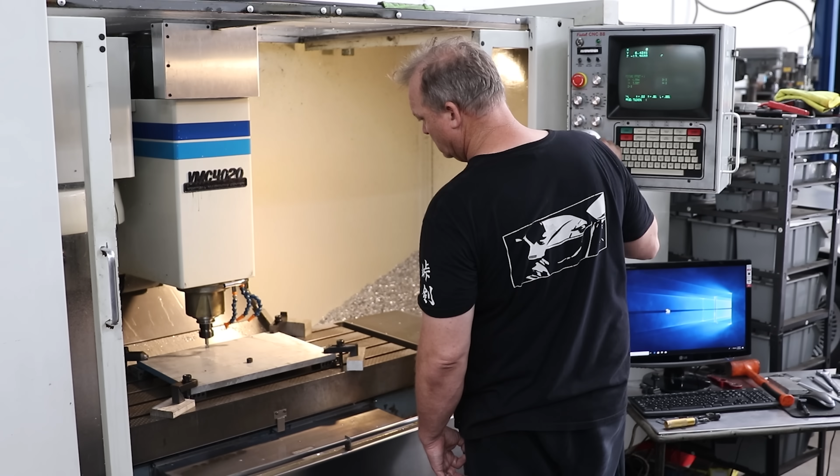All right guys, we're back here at Papadakis Racing. Steph has the new motor plate all designed in CAD on his computer, so we're gonna go check that thing out before the program gets emailed off to OMD and Ferrari Steve down in San Diego to get cut on their CNC. Let's check it out.

Steph! What's happening? What up? I got your motor plate already brought up, so we can go talk about that. That thing looks sweet! Yeah, so the CAD program we're using is called SolidWorks, and what we do is we start with the Romer arm, and we need to find out where all the bolt holes and the different features on the block are in space.

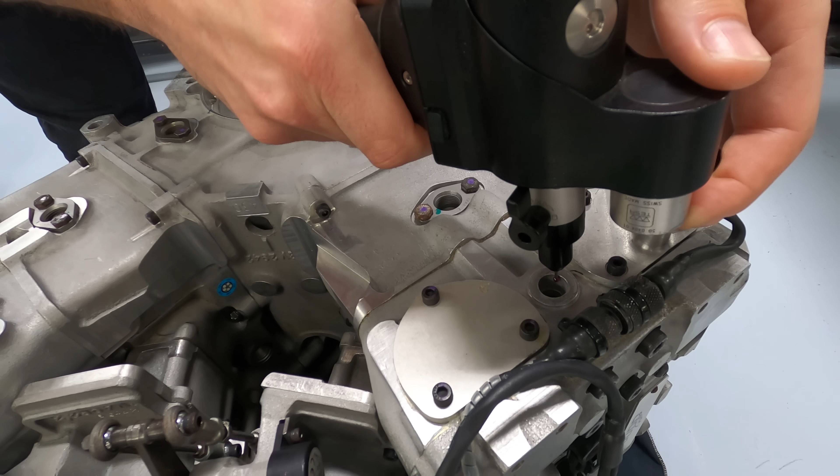Let me go backwards here. So all these different points are the bolt holes and the different dowel pin holes on the Judd V motor. So we'll start with just all of the bolt hole locations, and then I actually took a picture of the engine, and I can lay that over.

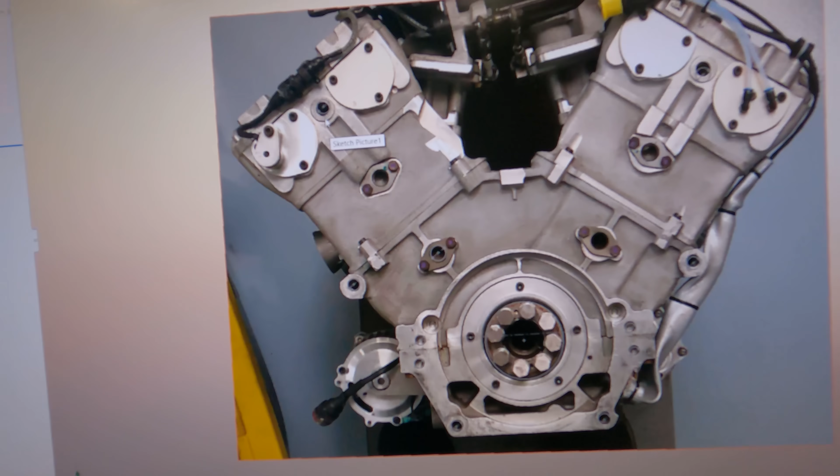Whoa. Yeah, so if you look, the points are still here. I mean, it's not perfect, but just to get an idea of what the motor plate kind of looks like and if there's anything that I gotta watch out for.

That's pretty cool. Yeah, and then I've added now the extra bolt holes for the bell housing. Bell housing bolts, and then bell housing bolts plus Judd V motor bolts. So now we know where all of the hardware is gonna go.

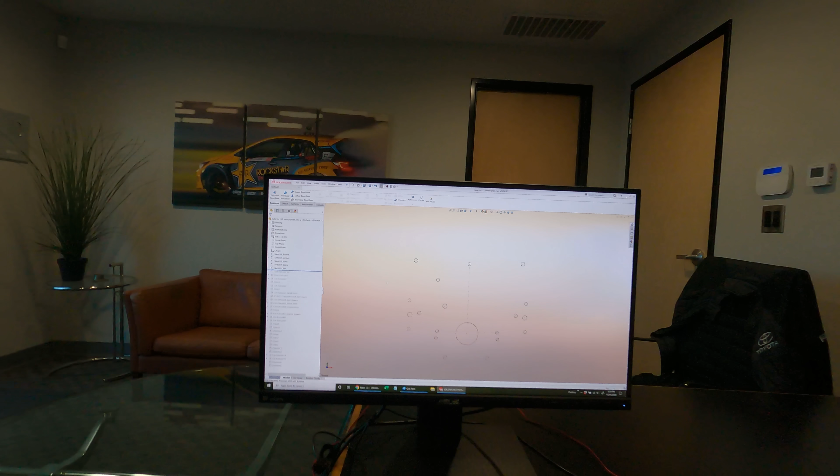And then I also took a picture of the bell housing. That's the bell housing, and those are all the points drawn on that, yep. And again, it's not perfect, it's just to get an idea, mostly for styling in a way.

Yeah, so this is now the outline of the motor plate, but there's no features in it yet. It's just an extruded piece with a shape. There's no pockets in it yet. It's basically just right, and that's built from a sketch that I do.

So this is the sketch based on all of the different points in space, and then just start making an elegant shape that makes sense, that clears any kind of features on the engine. So once you get your sketch done, then you extrude it, you turn it into an actual solid. On the left here is our tree, our build tree. Every time we add another feature, it adds another element to that tree.

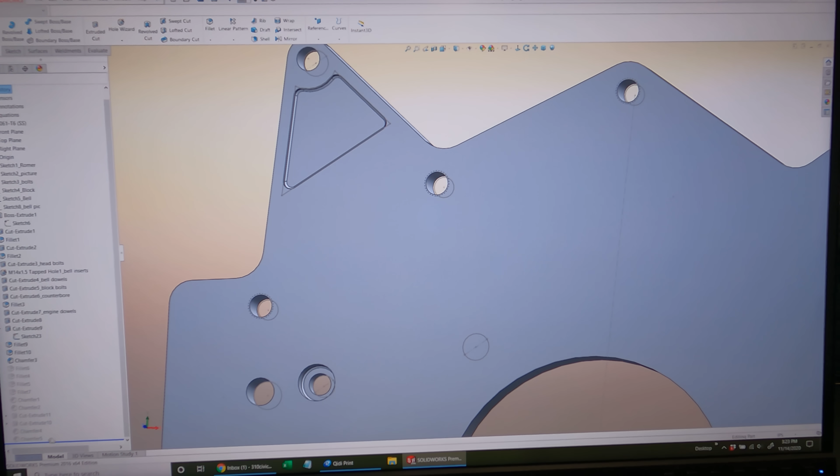Cool. Eventually, we put the holes in it, so now we've got holes in our plate. Now we've got the bell housing holes and the block holes. These are pockets now that have fillets and everything in them to make them look good. And eventually you just end up with the part that has all the right holes.

And then if you look, there's little features here, like these little chamfers. Cool. That the machinist can go and make sure that not only is it not sharp, but add some styling elements to it as well.

And that's it. I probably have maybe, how many hours? Yeah, probably 5 or 6 hours. Okay. Yeah, but this isn't my first plate, you know, so I already kind of know where to go and have an idea of the workflow.

You know how to navigate the program well at this point, and yeah, this is relatively simple too, because it's just 2.5D. There's no 3-dimensional contours or anything on it, and we're not connecting a bunch of stuff. It's just a shaped plate with several holes in it.

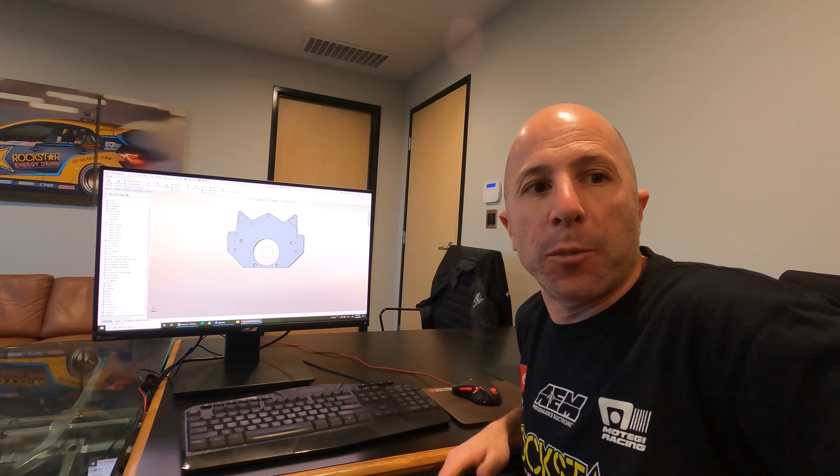I mean, the precision is what's really the most important thing, and that's where the Romer arm and being able to decipher that information and then be able to put it into the software comes in. And then at that point, you're now relying on the machinist. So we'll not only give him the model for the part, but we'll also give him what we call a print.

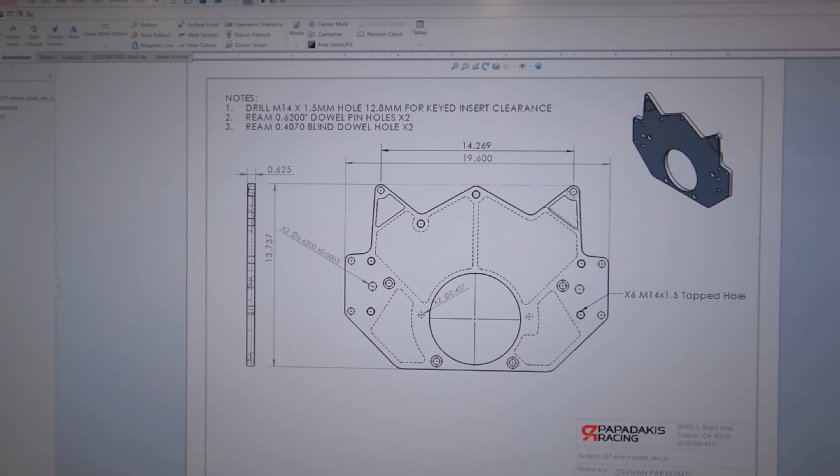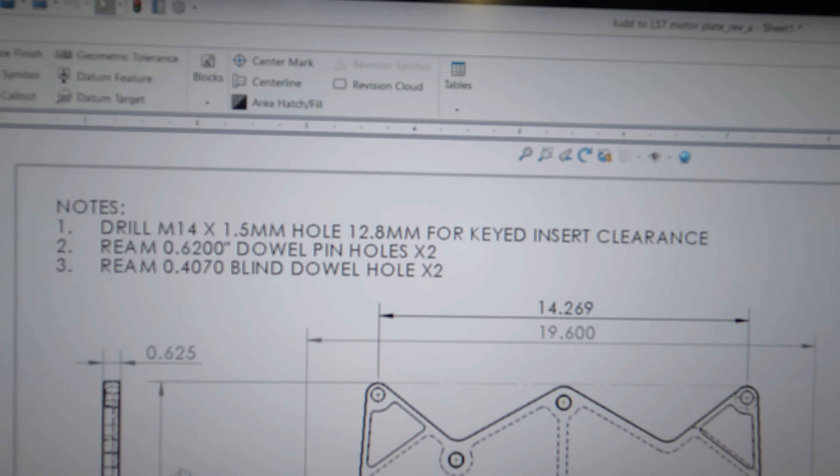The print shows where the tapped holes are, an overall dimension like the largest dimensions, width and height, so we can get an idea of the piece of stock or material he'll need to purchase, the thickness of it, and a couple of notes, like the dowel pins that align the block to the motor plate and the motor plate to the bell housing.

These are very precision, so we note that they need to be reamed instead of just drilled with a drill bit. This is for what we're doing, like hobbyist plus motorsport level stuff. If we're doing aerospace, it'd be much more involved, I'm sure there's engineers watching. This is a simple print, but for what we're doing, it gets the job done, and we can be efficient, have a phone conversation with the guy doing the machining, and come out with a good part. Glad to have you on board for one of the most important pieces of the puzzle.

We're going to email this off to Ferrari Steve down in San Diego at OMD. He's going to cut it on his CNC, and as soon as we get it back, we can fit everything up, make sure it's all set, and get that thing fitted in the engine bay. Pumped.

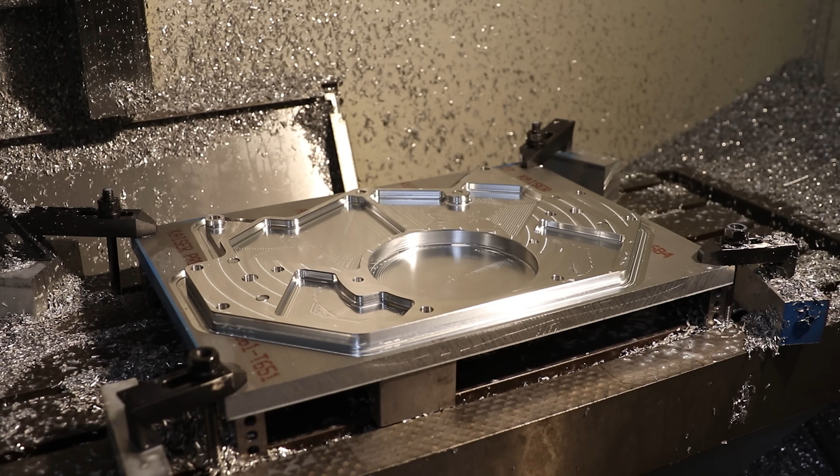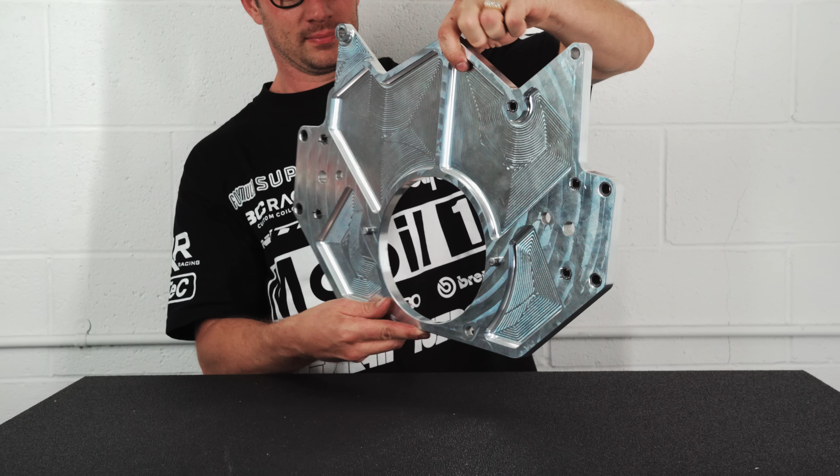We got our motor plate back. It is looking sick. Big thanks to Steph for designing this, and also Ferrari Steve down in San Diego at OMD. He wrote the program and cut it on his CNC, and it came out sweet.

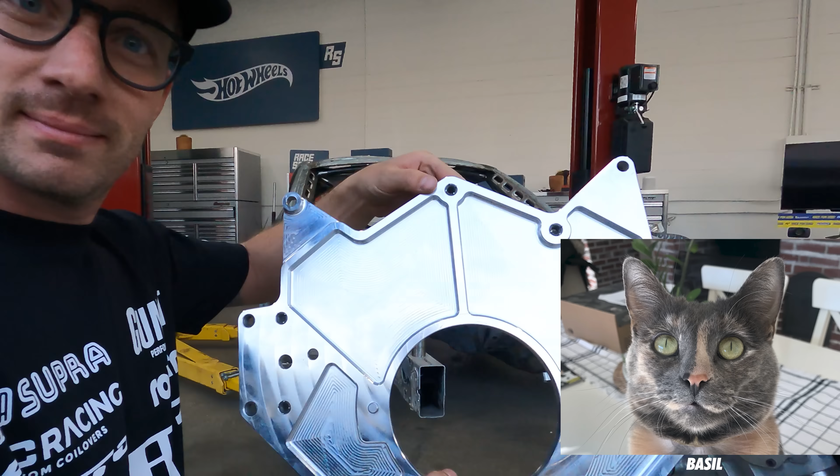Kind of looks like a cat, sorta. I mean, use your imagination.

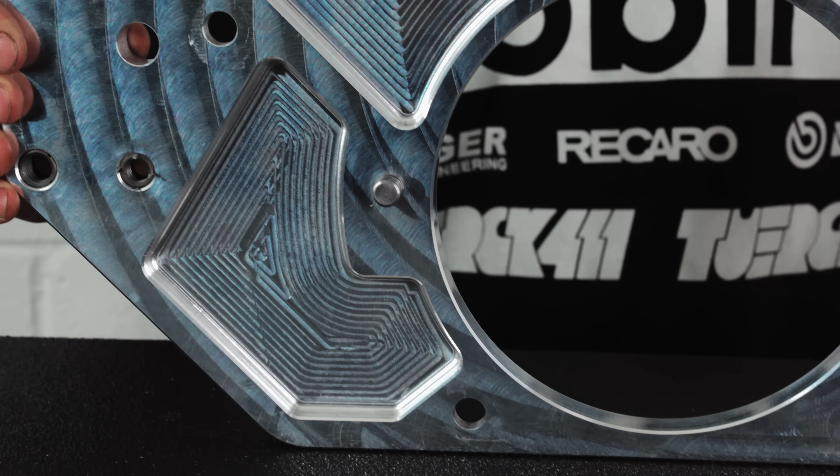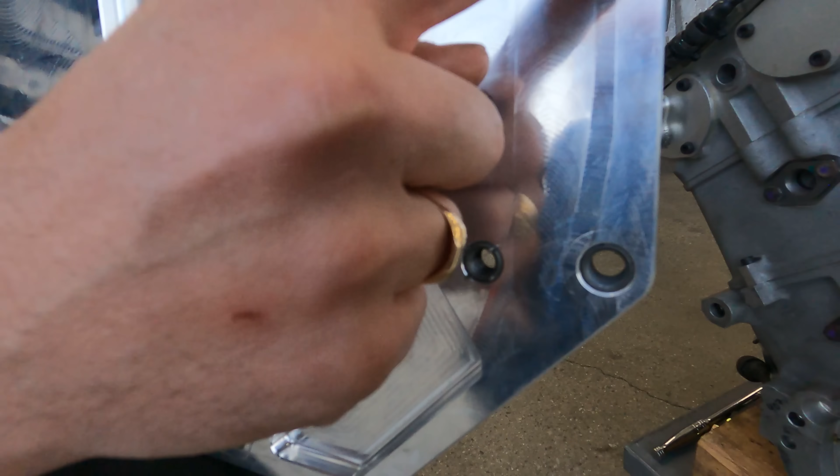Dominic got all the nutserts in here, so we didn't want to rely on all the aluminum threads, especially mating the bell housing of the Holinger, and also it being mated onto the back and being that major support for the drivetrain. So we got steel locking threaded inserts in pretty much every single hole we're going to use, and those are obviously more robust and a lot stronger than the aluminum threads.

So we got our dowel pins here, and everything came out really good. We got some nice pockets cut in here to keep this thing really light. This is the back side, where the bell housing is going to mount from Holinger, and everything's recessed in here, so everything's nice and flat when it gets bolted on. I'll show you guys that in a second.

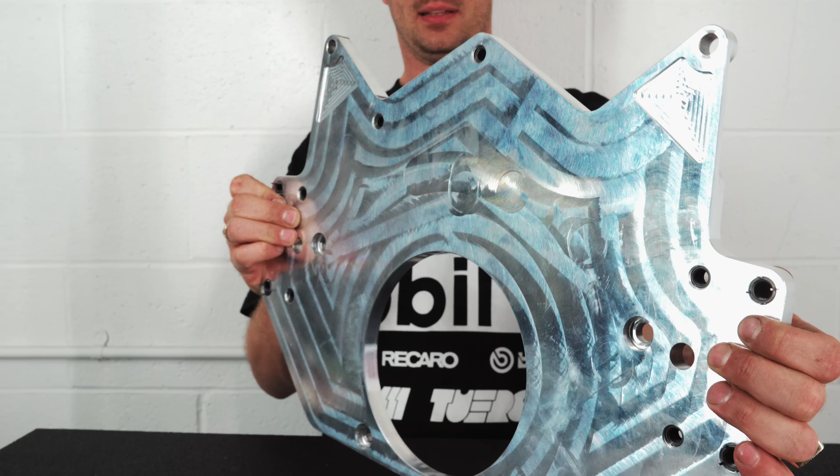We designed this in conjunction with Holinger as a 5/8 plate so they know how big the custom flywheel they're making is going to be and how far back that's going to come out, along with the quill shaft and where the transmission is going to lay. They also made a custom spacer on the transmission, that I'll show you guys here in a little bit, so that all of this stuff fits up perfectly.

The shifter fits right where we want it to, and the transmission tunnel and all of that. But right now, we're going to get this thing bolted up and make sure everything's all good.

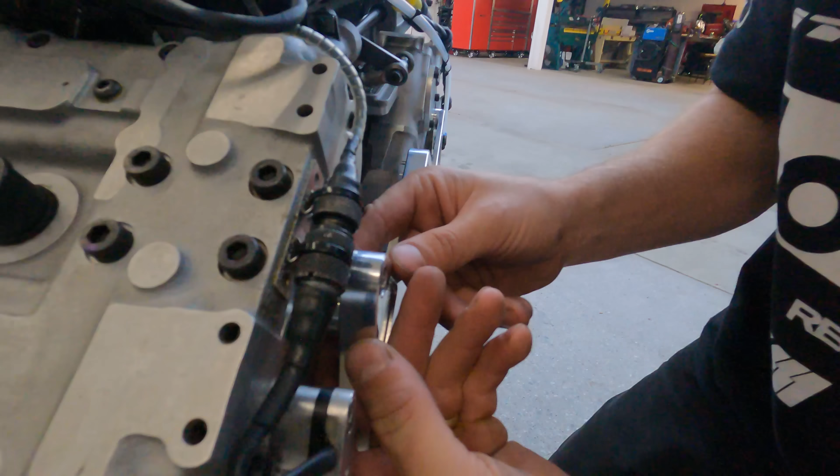It's really nice because all you have to do is locate the dowels on the back of the engine, and they are extremely tight in here, which is a good thing. There we go, put this little spacer on here. These two heads are actually offset, so we had to mill this one out a little bit shorter to make up the difference, and we just have this little spacer to bring her home.

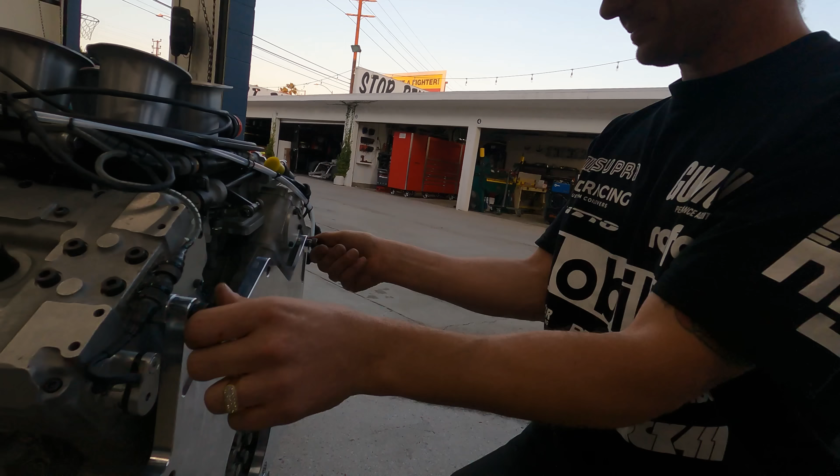So this is, I'm freaking pumped. This is such a big piece of the puzzle that's finished now. After this, Dominic can start, we can get this mocked up with the transmission on in the chassis, and Dominic can start making the mounts in the chassis for the motor plate.

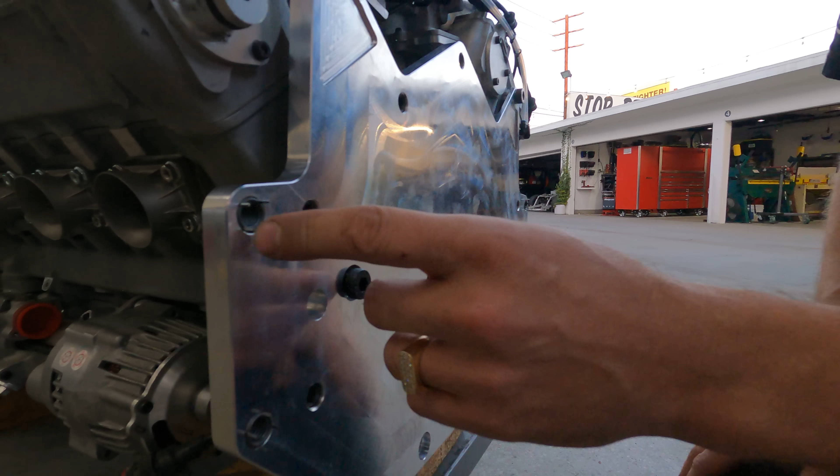So you can see the two ends here, we saved these two holes. We haven't pushed these pins in, that's why they're still poking out. We just want to make sure everything fits all good and everything bolts on fine before we set those, because once you set them, that's pretty much it.

You can't get them back out. So anyway, when we get to that, there's two brackets that bolt off to the end of here that will then go to the chassis.

It'll probably be like a nice triangular situation with the Delrin bushing that'll bolt into the chassis. Kind of a three-piece setup, because we didn't know how this was going to fit into the chassis. So we wanted to take it one step at a time, get this on, see where everything fits, then make the mounts in the chassis and the brackets for that. It's a step-by-step process since we're not designing this car in any sort of software.

Plus we got Dom's specs, so it's gonna be good no matter what. I'll wait to get the Holinger transmission and bell housing all sandwiched together, then fit that on here and place this thing in the engine bay and get to work. Let's do it.

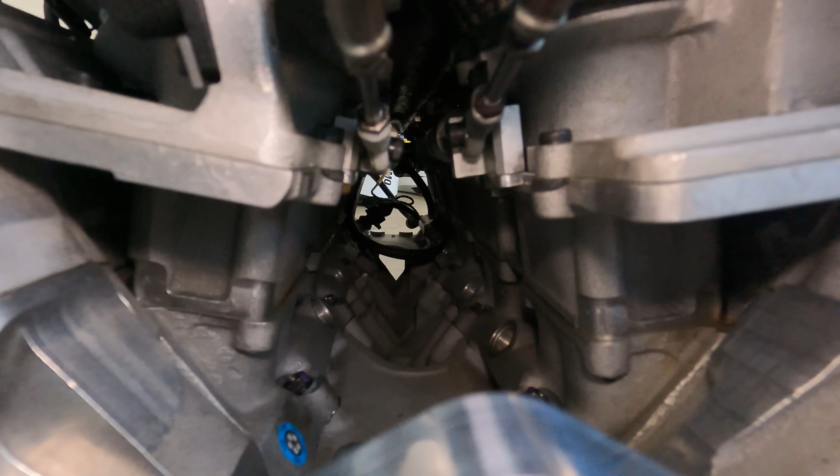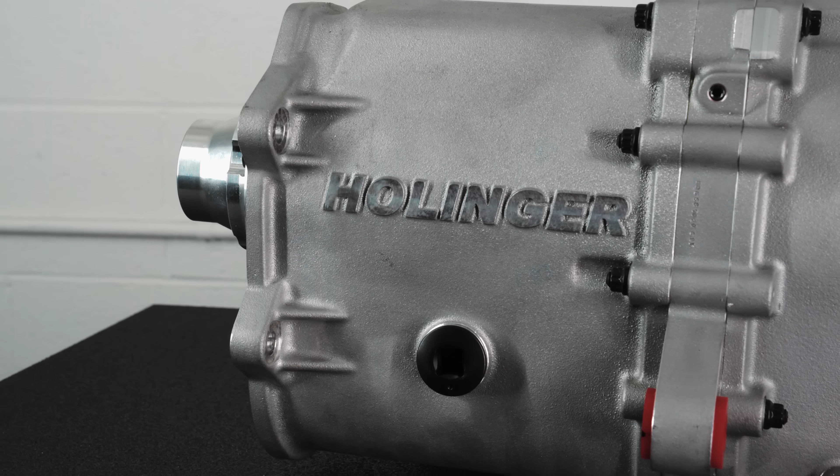All right guys, this is one of the biggest pieces of the puzzle on this build that I'm beyond stoked on, partnering with Holinger Engineering for this transmission. This is the Holinger RD6, a six-speed sequential, and I ran the same exact box in my Pro 86 car for five seasons. The only thing we ever had to replace, on a 1,000 horsepower 2JZ drift car that sees the most abuse I've ever put on any chassis, we'd send the transmission out every year to get inspected just to make sure everything was good.

The only thing I ever had to replace was a reverse gear, and that was on the fourth season, just because when you put it in reverse it sometimes grinds quite a bit. But it's a testament to how strong and amazing these transmissions are. Being able to partner with a company that has such an amazing product is phenomenal, this is massive for this project, and I wanted nothing less than a Holinger RD6S for this thing. So beyond stoked, and they've been phenomenal to work with.

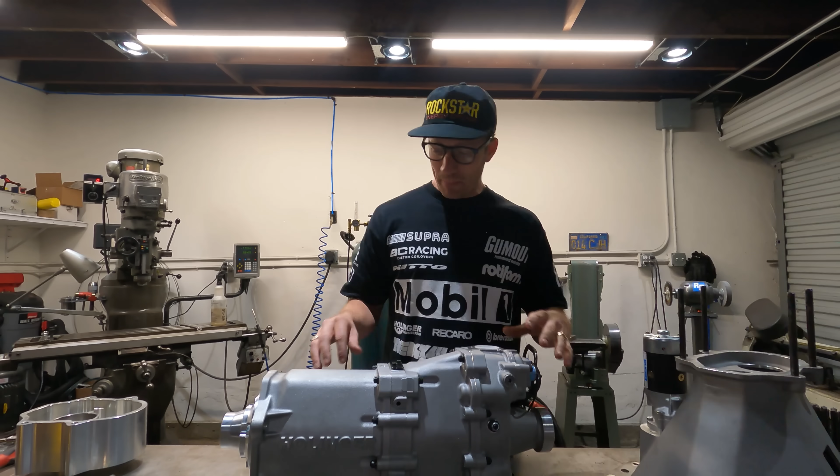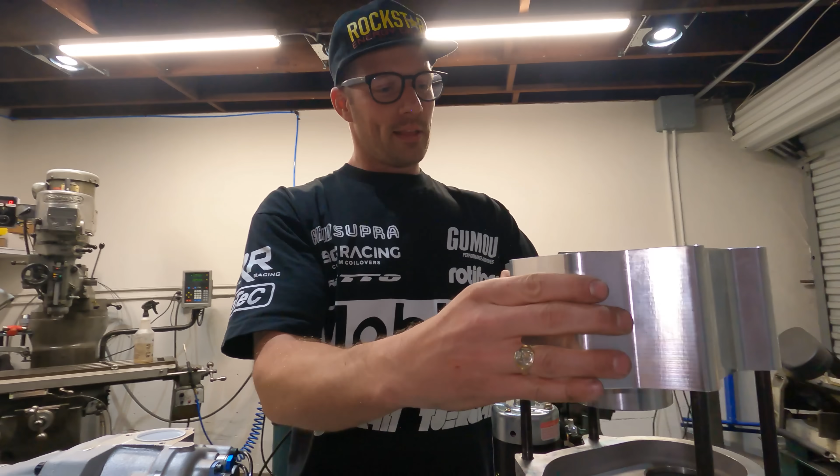They gave us access to their engineers, and they're actually making a custom flywheel that's going on the Judd motor. They work with Tilton for the clutch we're running, and made this custom spacer for the bell housing and engine so it'll kick the transmission back in the transmission tunnel, putting the shifter right where we need it. So the transmission sits really far back in the tunnel, which gives us better weight distribution, which is sweet.

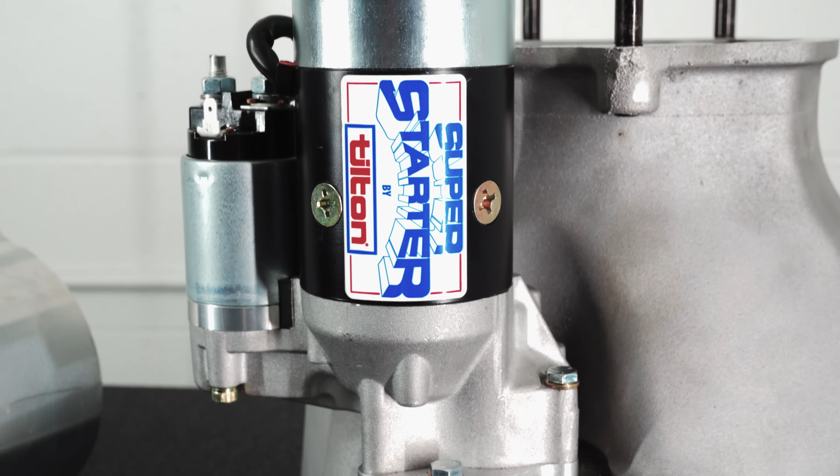This is an LS bell housing, and the reason they chose it is because we needed to figure out a starter situation with the clutch. Since we're not running a Formula car, we don't have that rear-mounted gear starter setup you fire up. We just need a push button with an actual starter motor, so the best solution was utilizing their Holinger LS bell housing, working with Tilton to use one of their Super Starters, and they made it work.

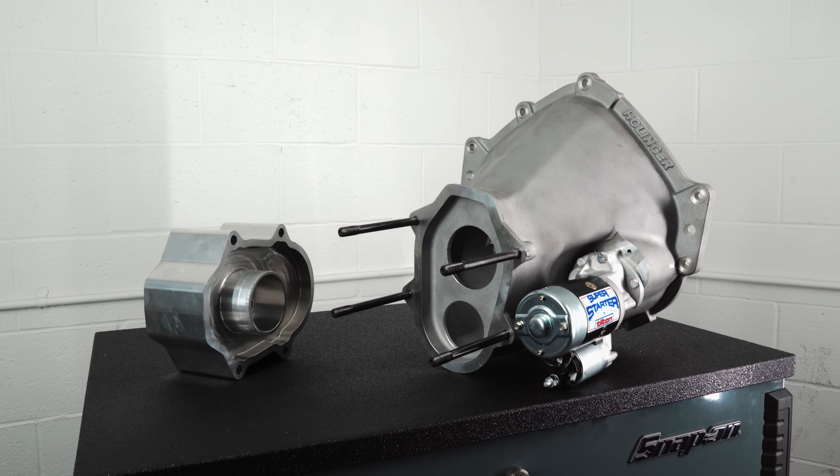So this thing just slides onto the transmission, and the transmission slides onto the new motor plate we just got, and we're styling, dude. We're gonna put this in the car and get it mounted finally in the engine bay. It's gonna be sick. Dom already has his ideas on what he wants to do, let's get to it.

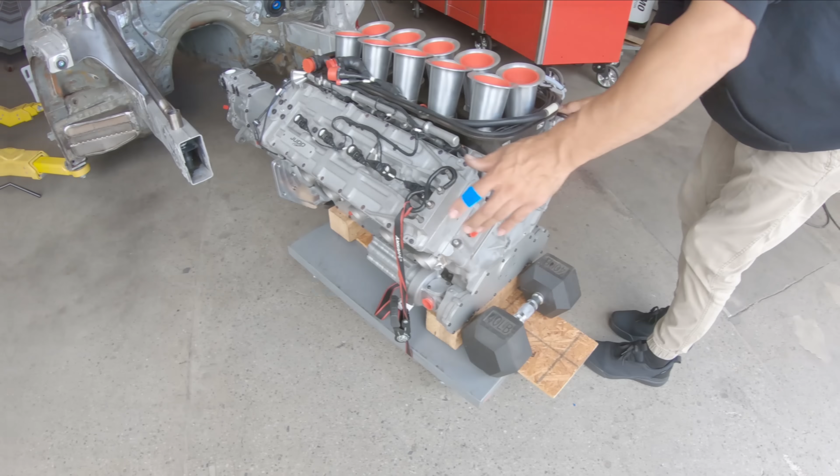The engine is finally getting put in the Supra. Everything is sandwiched, bolted, tightened, ready to rock, and now we can finally place this engine in its home, right here in the Supra's engine bay. This is big, it's huge.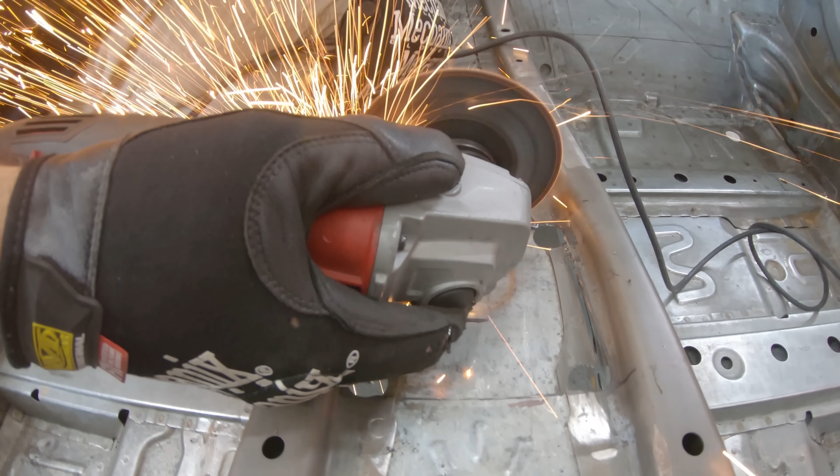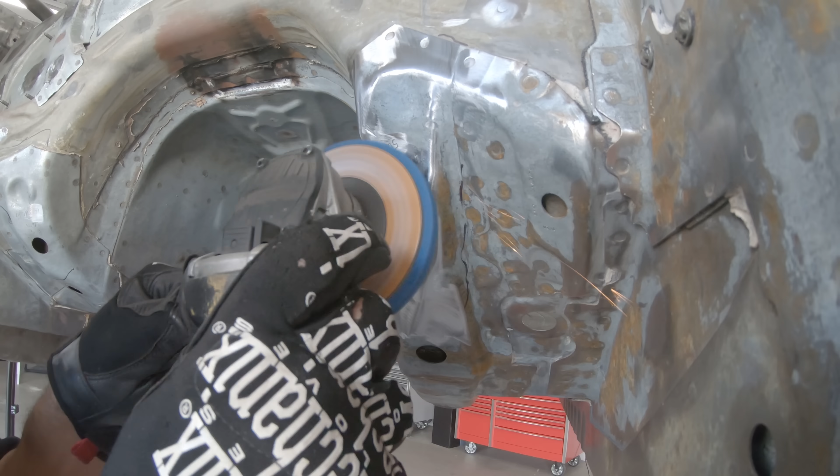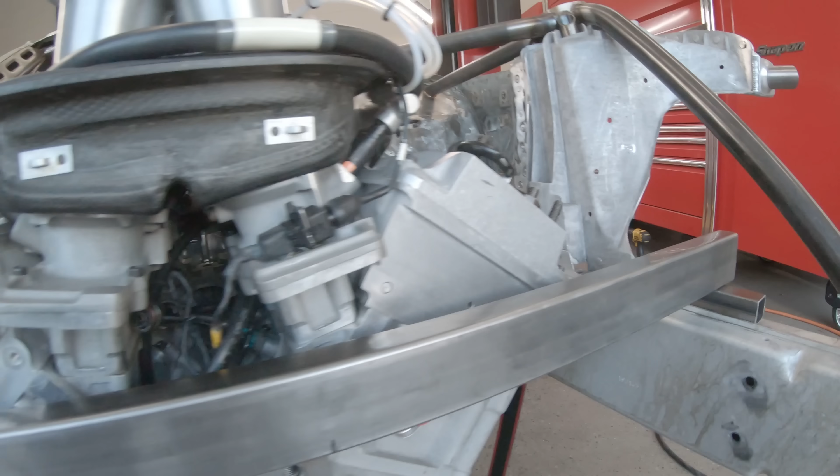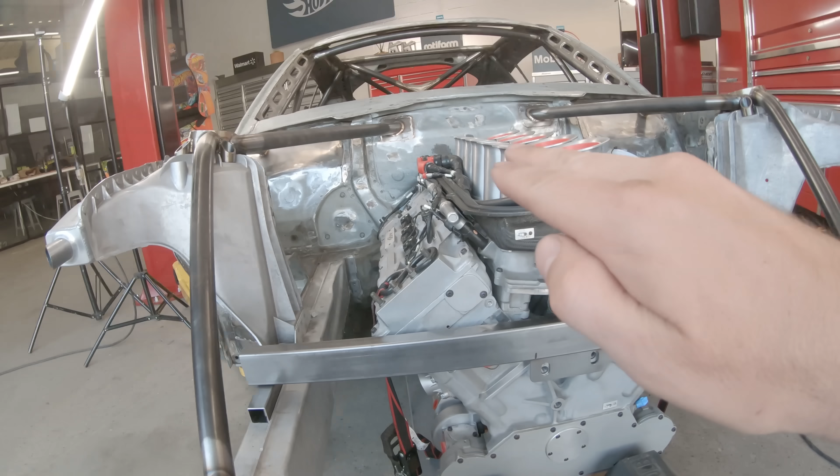This will bolt to here, and then we'll be able to stack little metal on here to level it out as we want. But this will hold the front in place. We'll pick it up, straighten the trans out, and put that in place. This basically is going to hold the front so that we can level it this way, front and back, get it exactly where Dom wants it, nice and level, flat, and start building some mounts.

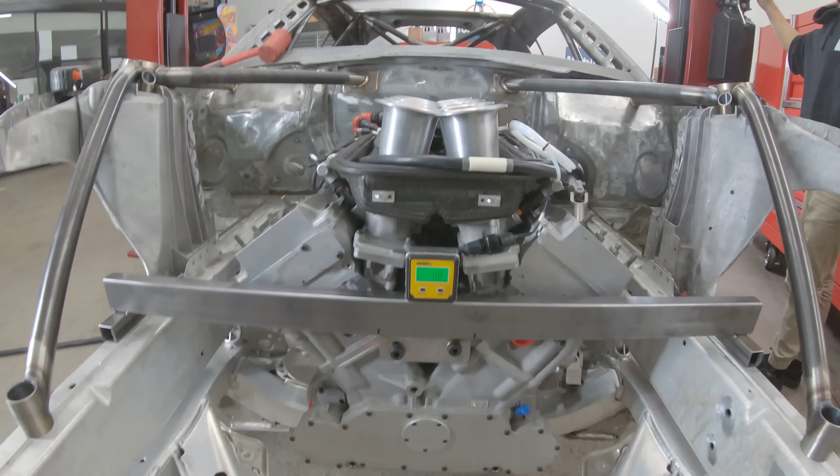As you put more pieces of the puzzle together, you realize that more and more stuff probably isn't going to fit the way you want it to. The starter hits, the steering rack doesn't clear. Oh, the steering shaft for the column, that's gonna be a big dilemma issue for the header build. So this little guy is not happy.

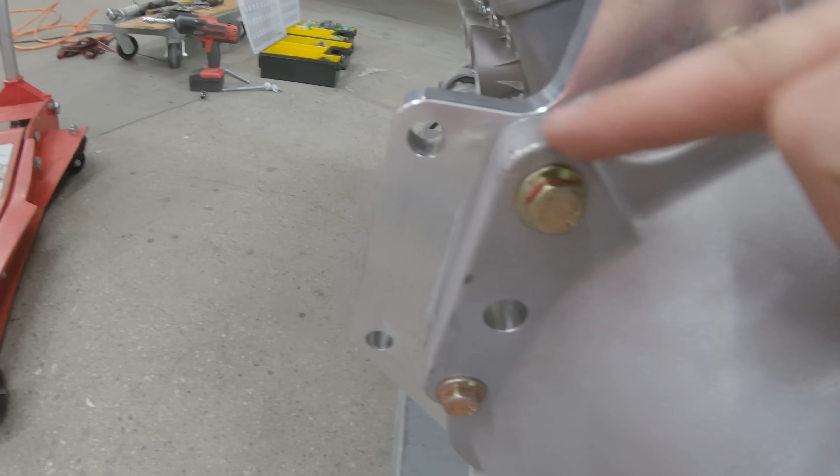If we clearance this spot right here, we're then gonna get into the bolt, so probably just leave that bolt out of the equation. We got 5 others.

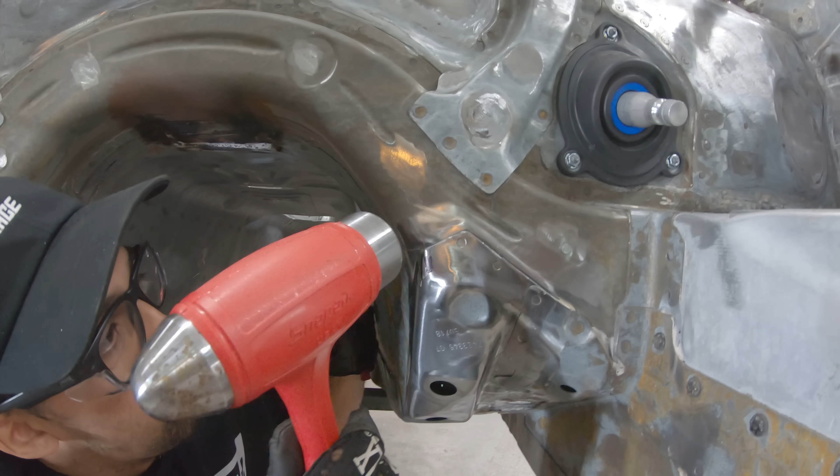So the starter doesn't really clear that well. We have to position it down so that it does clear.

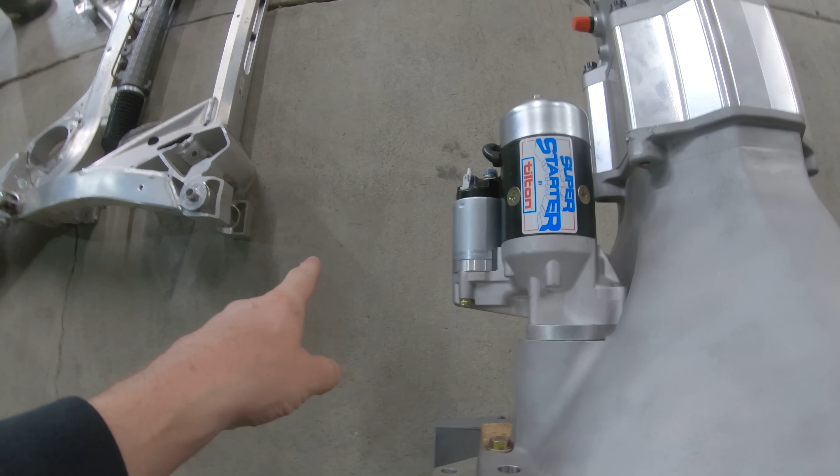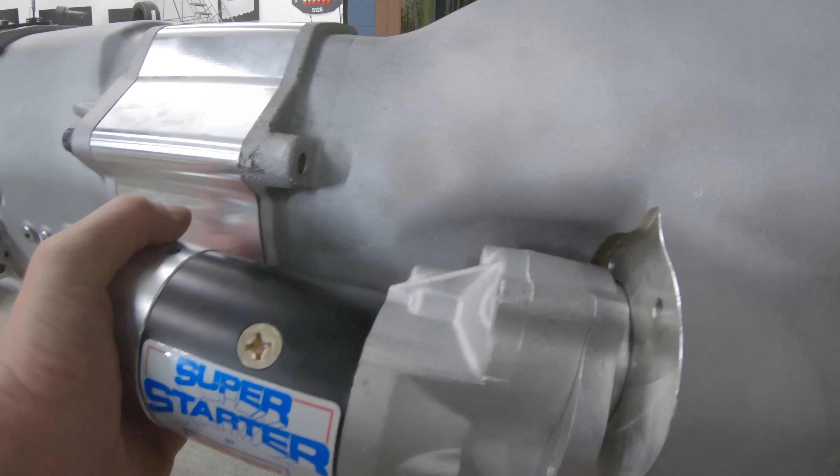All right, so I'm gonna show you guys how it's supposed to go. It's supposed to go like this, roughly. So that's how it's supposed to sit, riding all the way into the transmission tunnel support, which we don't want to cut out. So this has to angle down, so we want this to fit down here, and that gives us a lot more clearance. We're just trying to make that fit in this area right here, and we're getting there. And then we're still gonna have to do some clearancing on the chassis, so we'll probably still have to hammer in the trans tunnel right around here somewhere.

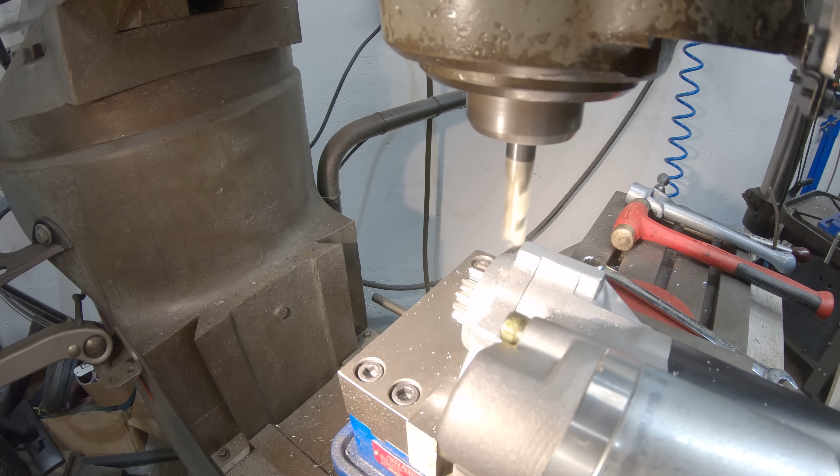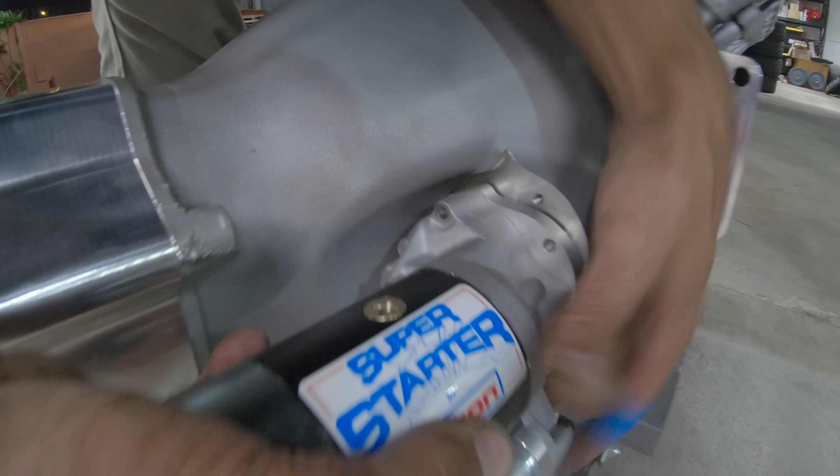Yo, perfect, there it is. So now, Dom to the rescue, let's punch the new holes.

Hole there, hole there. That one's just gonna be really tight, but we can still get one in here. It's gonna be all three, mega tight. Freaking A, nice job, dude.

Gotta love when a plan comes together. Right, Koozie? Hey, two thumbs up.

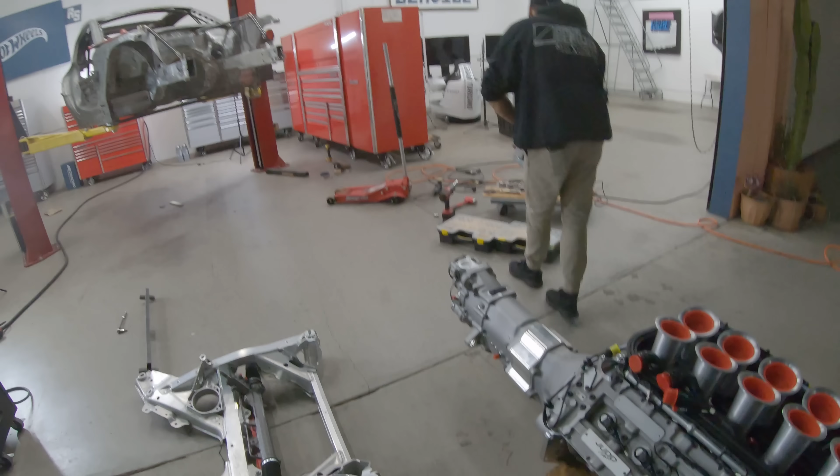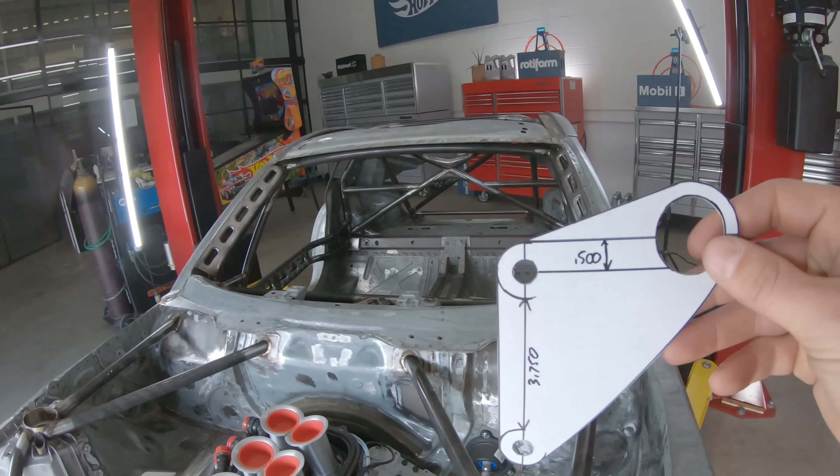So this is gonna be the template off of the motor plate. This will be the right side. I'll fit it up so you guys have a better idea what Dom's going for here. It's gonna be pretty cool though, pretty simple. We had to do it offset from the motor plate, so this has to move forward in order to clear this area here since it comes forward on us. So this is gonna bolt to here.

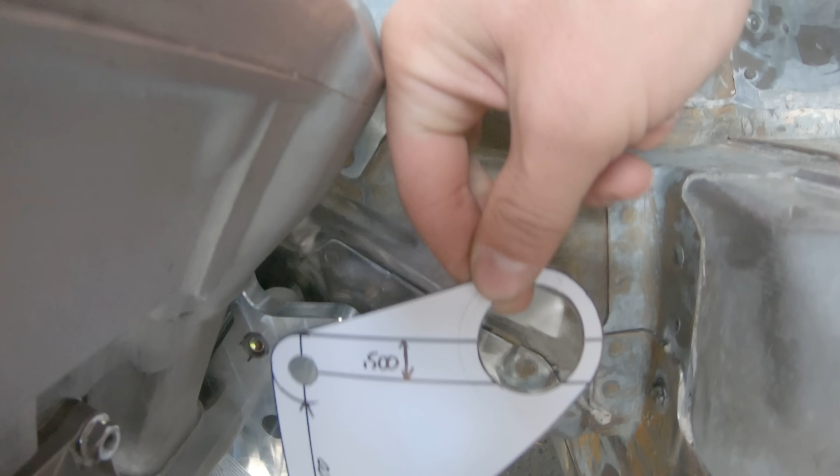And then I believe the idea is we're gonna have a bushing in here. And in this area, since it's gonna be offset and pulled forward like this, around here, we're gonna drill through the chassis. Since this is a really thick part of the firewall right here, it's probably the most structurally sound, strongest part of this entire area of the car. So we're gonna drill through here and put a slug that's threaded and have this bolt into here. So this will be bolted solid straight to the motor plate on these two pickup points right here. That's the game plan right now. Should work out really well.

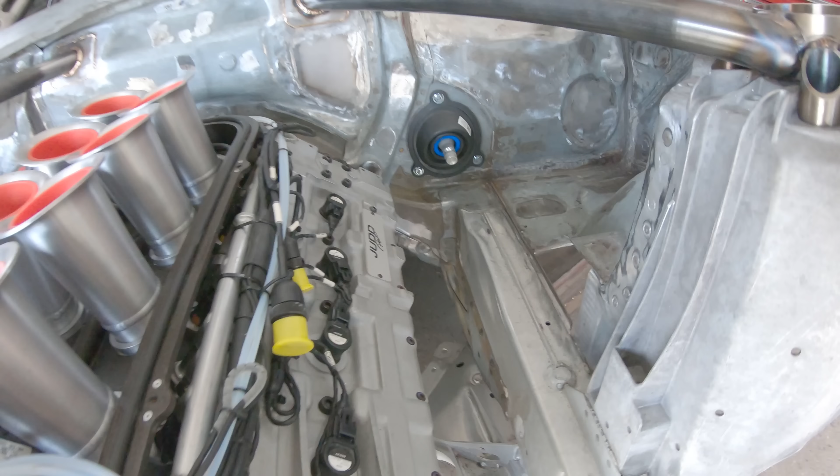That'll be the strongest, and also leave a lot more room for the steering shaft, and a little bit more room for the headers on this side, since the driver's side is gonna be really tough with all the accessories down here and the steering arm coming down. So we're gonna have a bunch of clearance issues on this side for the header, which just makes Dom's life a little more difficult, but here we go, dude. Let's do it. Let's get this motor mounted, baby.

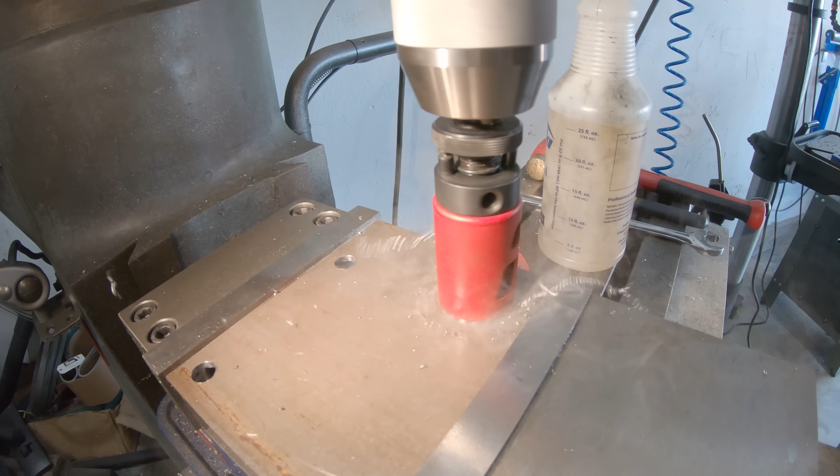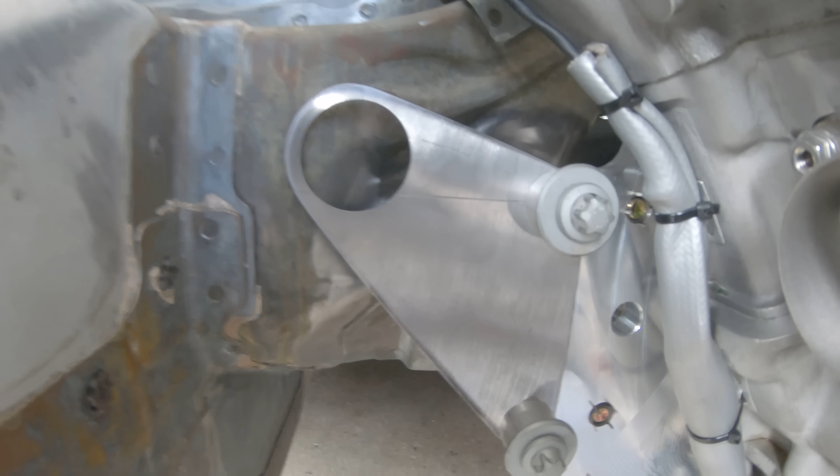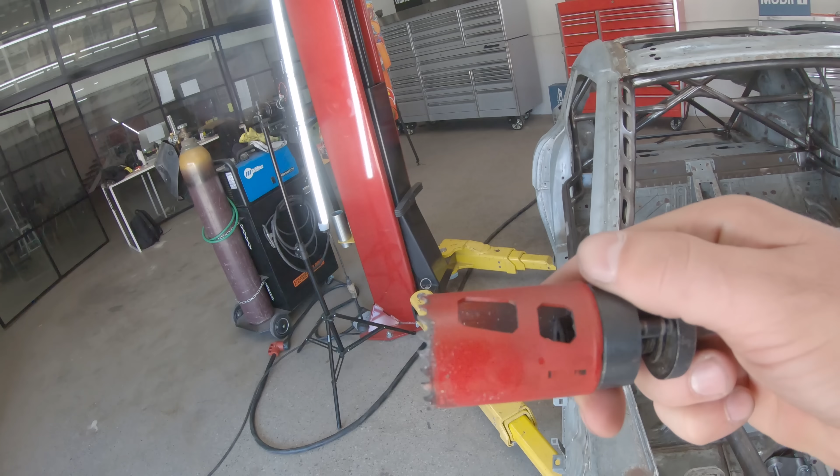So this is basically just a guide for the drill bit to drill through the firewall, and that'll be our pilot hole to then use the hole saw. Trying to get this as straight as possible on an angled piece of metal, definitely not the easiest. So Dom just cut this up in the lathe to guide that drill bit nice and straight, hopefully make it through the hole in the firewall as straight as possible. Then we'll cut it with the hole saw, and then start making the slug with the threads in it, much like we did with the rear end, and we'll be one step closer.

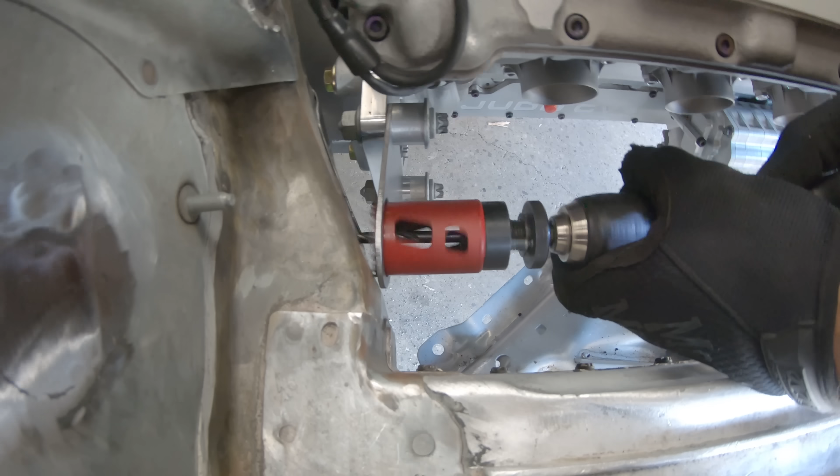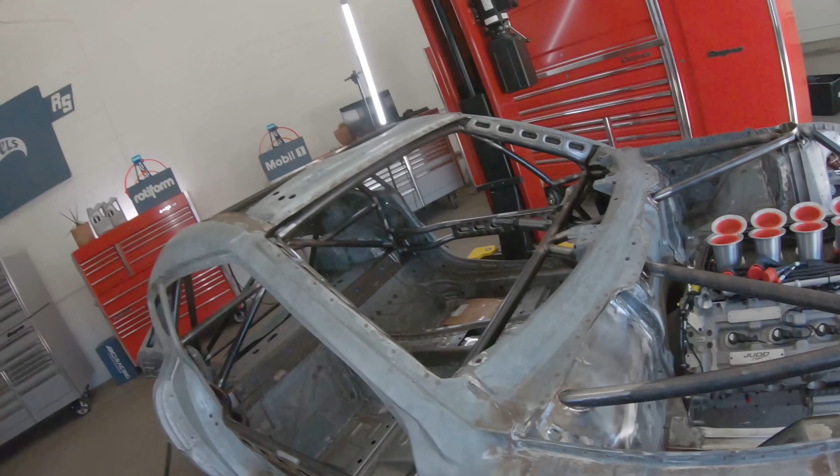All right, first hole done. Tore through 2.5 hole saws to do it. This steel is super hard, and it's just an angle cut, just chewing the crap out of the teeth on the hole saws. Thankfully we have one new one left, hopefully they get the rest of the job done. We got 3 more cuts to do.

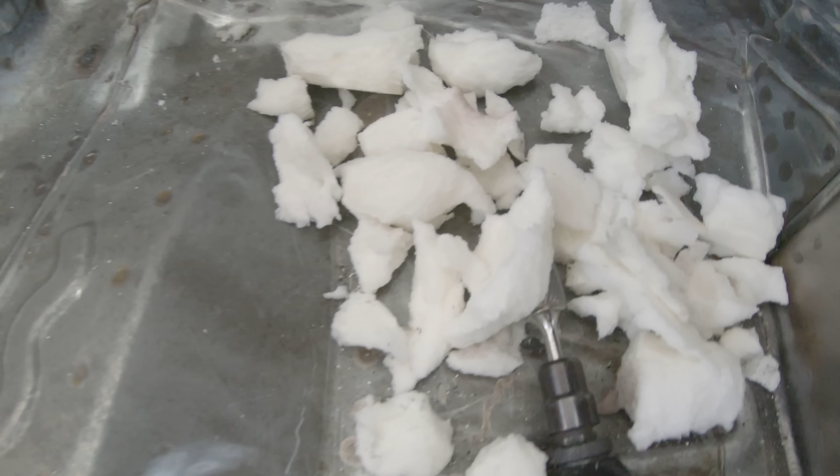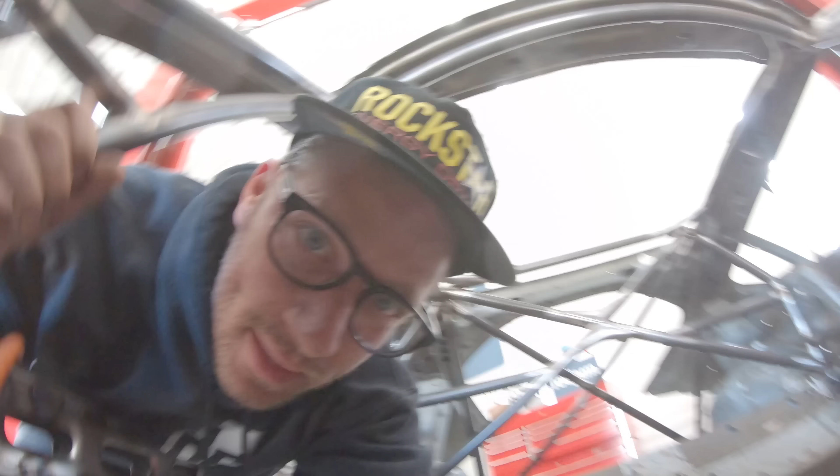I just dug all this foam out of the hole in hopes that Dom can weld it nice and clean and doesn't have any kind of shitty spitting welds on it. We'll see. I'm still gonna burn some fire in there, try to heat it up, hopefully burn the rest of the glue off of that area.

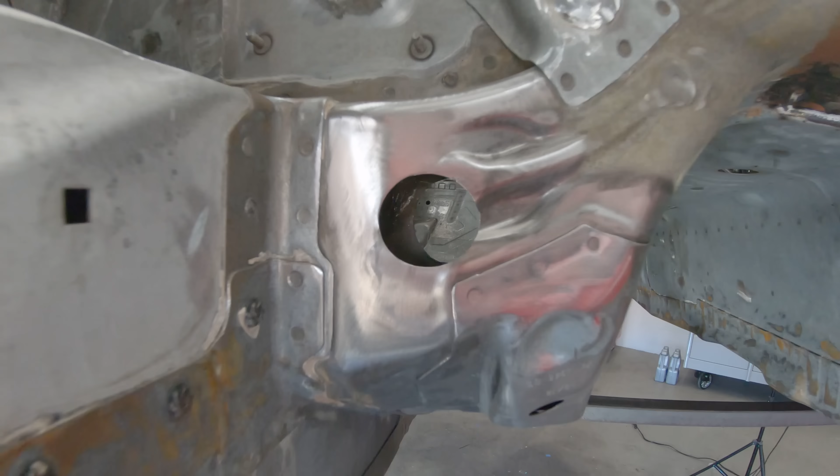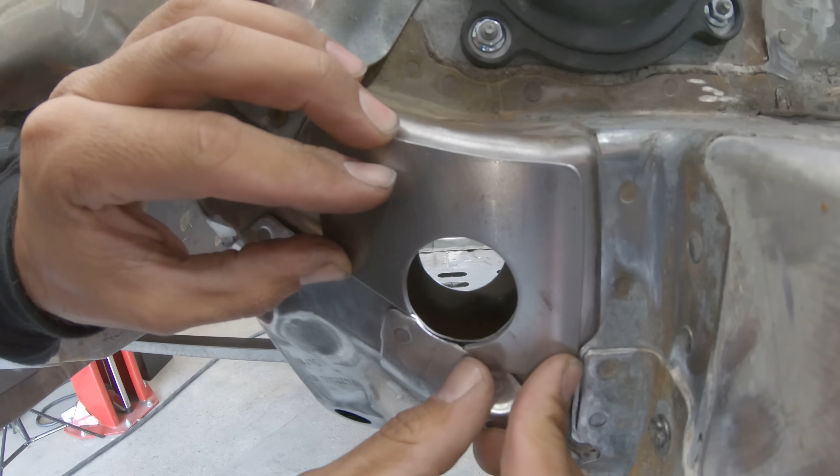That's a nice fit. These are the support plates that are getting welded on to support the brackets that are then going to bolt to the motor plate. From that to that - it's pretty good.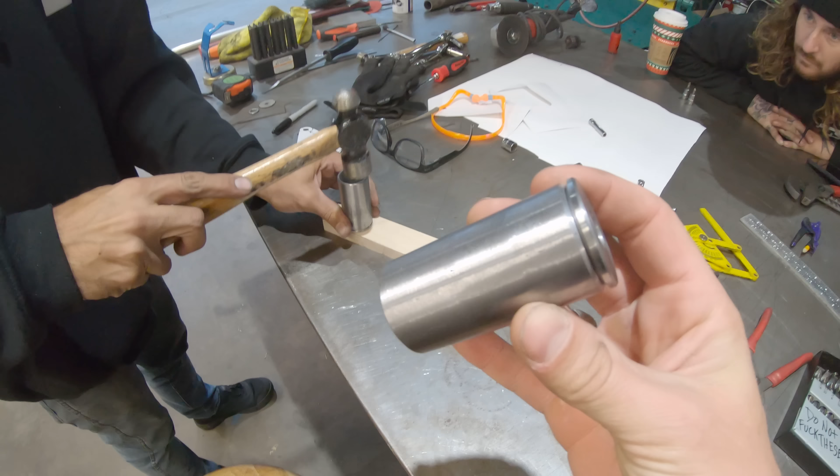So these are essentially the motor mounts for the motor plate and for the Judd, obviously. These are going to get welded into the chassis from the holes that Dom drilled through with the hole saw, and then he made these bosses that are threaded to M14-2, some nice big metric hardware. So it should be rock solid, and then we'll be running a Delrin bushing. This will be the bracket that these will kind of slide on like that, and we'll run a Delrin bushing here in the bracket to try to take a little bit of the vibration out.

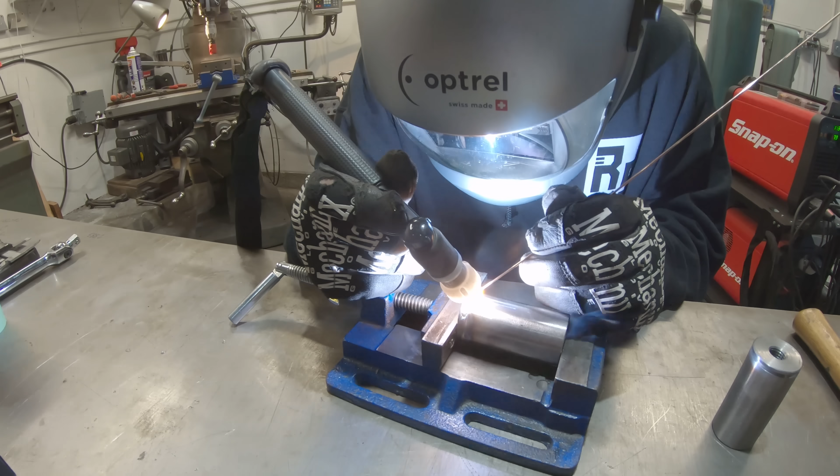Motor mounts prepped up, boys, this is it. Well, Dom still has to make a bracket for it, but still, motor mounts going in, motor mount's going in for good. And the motor is out for probably the 12th time again, but that means Dom gets to do some finish welding.

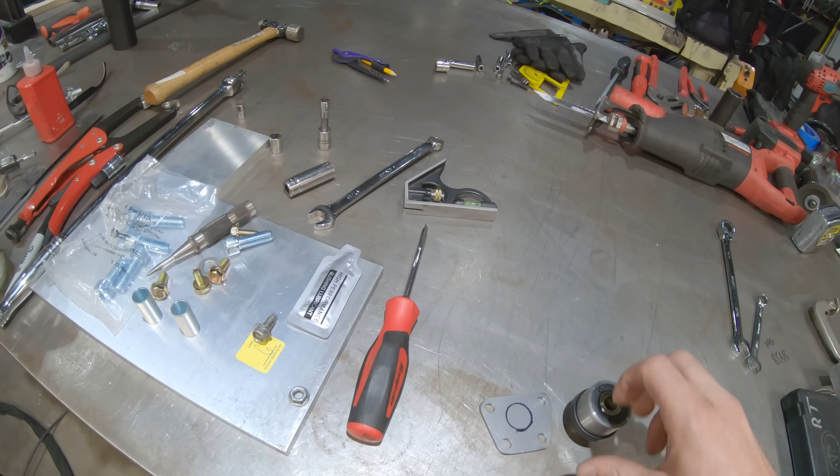So this is what Dominic is working on, the transmission bracket. Essentially we're just gonna have this bolt to the back of the transmission, and then this weld onto here, and then this bushing is basically just gonna slide - the transmission is gonna slide into this case that'll be welded into a different spot that will just hold it in place. So it's not really bolted in, it can just slip in there as you put the transmission in. It's basically a slip fit, it's gonna be a pin.

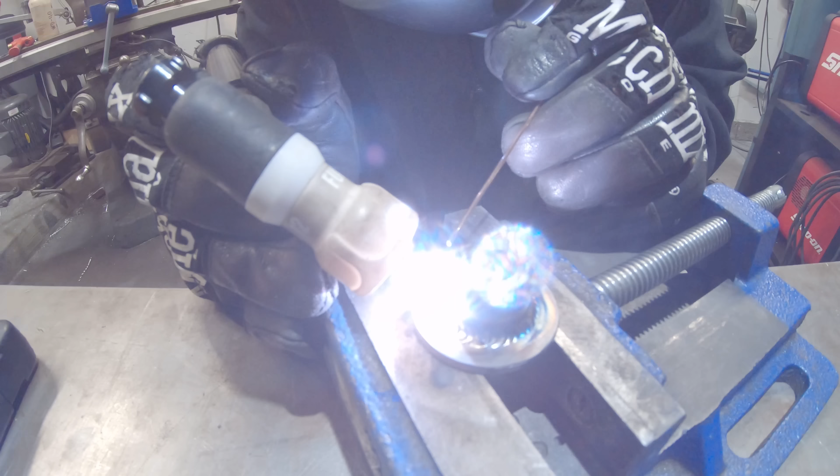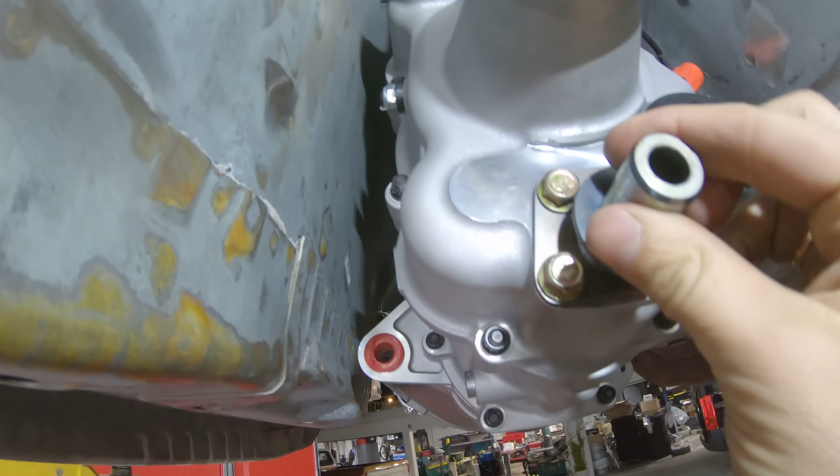There's only gonna be a few things MIG welded on this car, and this is actually gonna be one of them. The two plates for the support on the transmission mount are just tacked in right now.

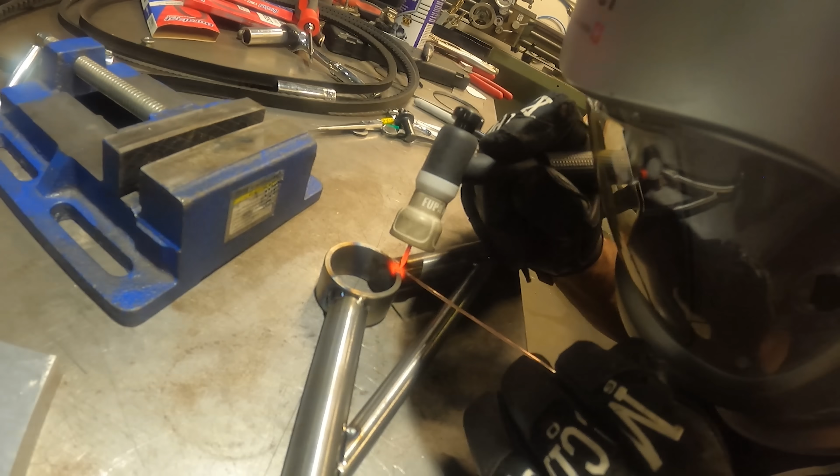Dude, that thing looks sick. Here we go, sweet ass transmission mount finished. Dom spec as usual, looking sick.